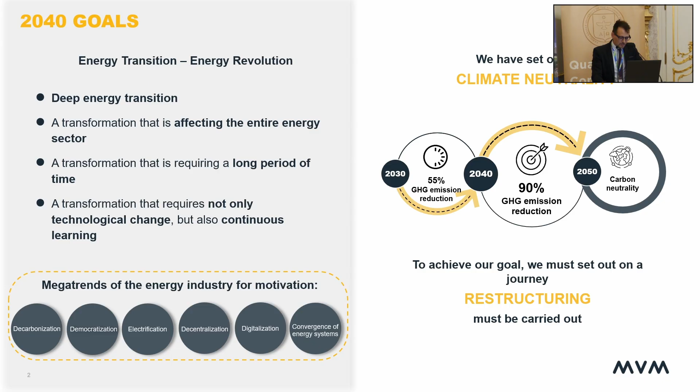It is not an exaggeration to say that we are experiencing a kind of energetic revolution in the energy industry of today. There is a revolution in the world of energetics, which basically means it is undergoing a major transformation. We can read a lot about energy transition or energy revolution in articles in the media - energy transition, green transition, etc. But in my opinion, it is an energy revolution.

So we have set our goal. We had very clear targets: climate neutrality. Let's see how we achieve our goals.

This energy revolution is a very deep energy transition - a transformation that is affecting the entire energy sector, that requires a long period of time. The transition cannot happen overnight. We need to go forward step by step in this energy transition, this energy revolution.

In my opinion, it's very important that this transformation requires not only technological change, but also continuous learning. We need to learn energy efficiency. We need to learn how we can live and work in this climate neutrality world and sustainable development - how we can use this climate neutral energy system.

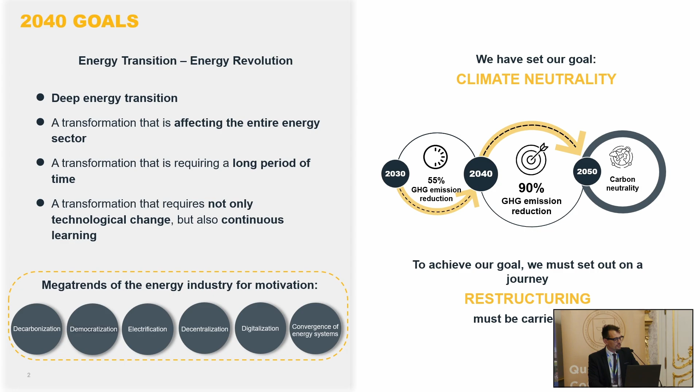These targets or goals designate the megatrends of the energy industry motivation. We had six important megatrends: decarbonization, democratization, electrification, decentralization, digitalization, and convergence in energy systems.

So for this environment and climate targets, the climate targets have an impact on the most important energy definitions and energy goals.

There is energy generation, transmission, and distribution, energy storage - very important - district heating and cooling systems, development of renewable technology, as mentioned by Fanny and Eva also, coal phase out - a very important keyword - and also energy efficiency and fossil-free transport. The transport sector also uses a lot of fossil fuel.

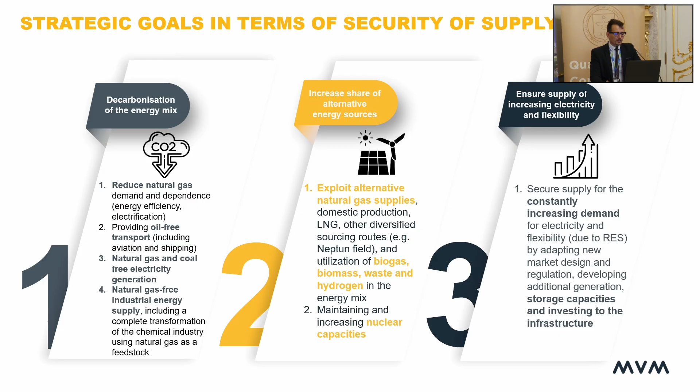The strategic goal of security of supply from the MVM point of view is decarbonization of the energy mix, increasing the share of alternative energy sources - for example, biogas, biomass, and hydrogen - and ensuring supply of increasing electricity and flexibility.

We can see in this slide that we use about 20% electricity from the total energy consumption, and in the next couple of decades, this electricity share is increasing to about 49% of total energy consumption.

As I mentioned earlier, one of the megatrends is electrification, because electrification is a good solution for how we can replace more natural gas and fossil fuels. Our direction is clear: coal phase out, natural gas free heating, and industrial energy supply.

We need substitution of natural gas in the energy mix, increasing the supply of electricity. Electrification generates significant renewable capacity and maintains nuclear production. The flexibility of natural gas-fired power plants is needed because we have a lot of weather-dependent renewable systems, for example photovoltaic systems, and this poses serious challenges for both the electricity generation and network sectors.

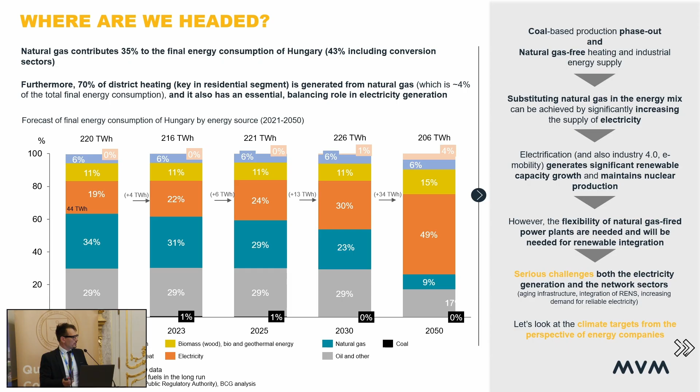As I mentioned, I work in the MVM Group, and MVM Group is a 100% state-owned company. We are the second largest company in Hungary, and we are very proud. We have a very big electricity portfolio - a total of about 4.4 gigawatt total capacity of electricity generation units.

We have one nuclear power plant in Paks with 4 units, about 2,000 megawatt installed capacity. We have more than 200 location PV power farms and power plants, with total installed capacity in our system of about 800 megawatt from PV. MVM Group's activities cover the entire energy value chain.

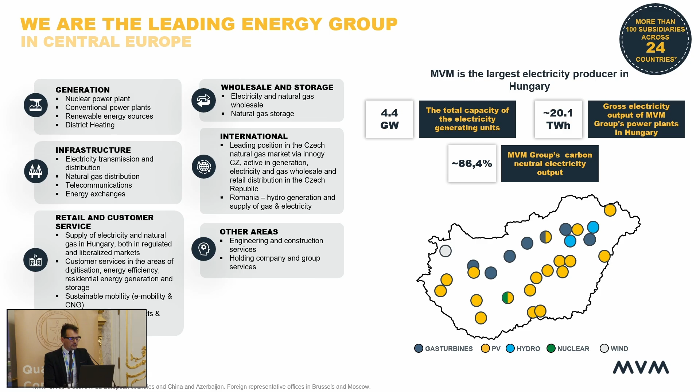The generation, the infrastructure, the retail and customer services, the wholesale and storage, international. We have the very massive international field, more than 20 countries, plants, power plants, and factories. We have also factories in China, I mean 2 factories. So this Hungarian group is growing step by step.

So what is our vision, or what is our targets? What is our strategy? In our strategy, the last strategy for MVM Group will be published in December 2023, and we looked ahead to 2035. We have 5 important strategic pillars. This is the renewable energy portfolio. We need plus 3,000 megawatt additional renewable energy portfolio, not only in Hungary.

The second important pillar is the nuclear capacity. So we started the lifetime operation in Paks. We have in Paks 4 units from Russia technology, but from a technical point of view it's a very good unit. So we started this lifetime operation project, and we're starting one SMR project. We are applying the SMR technology in the next couple of decades.

And if I mention, we have the very big renewable energy portfolios, and this portfolio is weather-dependent, and because of it we need plus 2,700 megawatt flexible capacity and tools to facilitate network integration.

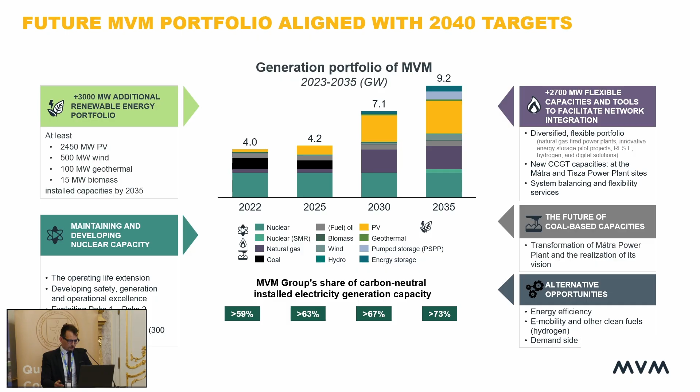And of course we search for opportunities and possibilities for alternative options, for example hydrogen. I would like to show 2 concrete projects from MVM's portfolio. One of our options is hydrogen, or one of our options is to exploit the potential of hydrogen. Why hydrogen? It's a very important question, and I know it's not an answer to all of our questions, but in my opinion, in the future hydrogen will be a very important energy source. So why hydrogen?

Because hydrogen is a highly versatile energy source. It offers multiple pathways for utilization and can be produced through a variety of technologies. Hydrogen doesn't have carbon molecules, so if we combust hydrogen we have 0 CO2 emissions. So our target, shown on the right side of this slide, is to put hydrogen into our natural gas system, and by burning this energy mix of natural gas and hydrogen, we can reduce the CO2 emission. And we know it needs to go forward step by step.

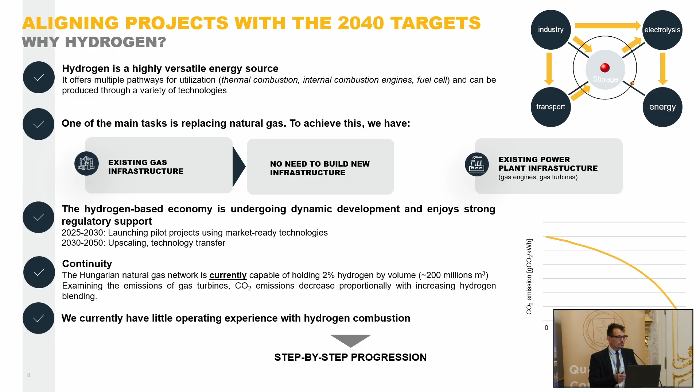For example, the first part, we would like to mix 2% by volume into the natural gas system, and step by step increase to 10, 20, and so on. So one of the main tasks is replacing natural gas and achieving this. We have existing gas infrastructure in Hungary, so if we use hydrogen we don't need to build completely new infrastructure. We can use the old natural gas system from an infrastructure point of view.

So the second energy project for the MVM group, a very important area, is energy storage. We have built a huge weather-dependent renewable portfolio, and the security of supply cannot be based on this alone. We need to address energy storage, and battery energy systems are one of the keys to supporting renewable energy production, energy efficiency, and security of supply.

We are very proud that we finished 2 pilot projects in the last couple of months: Horus and Tesseract. Both are at the Liter site. Liter is a very small town in Hungary, but it's a very important energy center of the Hungarian system. The Horus project is a lithium-ion battery energy storage, and the Tesseract is different, it's a sodium-sulfur battery.

It can be seen that we are building a diversified portfolio from BESS systems also. And we have prepared 3-4 new projects, which are in preparation: Bakony, Tiszan, and Sopron, in different places in Hungary. Both are lithium-ion projects, and we can show the total installed capacity is growing year by year.

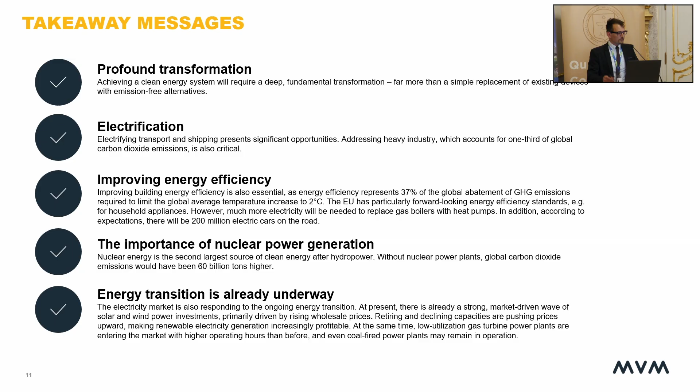And what is my takeaway message? In my opinion, we have a lot of keywords, a lot of strategic pillars. So profound transformation, electrification, if I mention, is very important. Improving energy efficiency, the importance of nuclear power generation, is very important in Hungary. Then the energy transition is already underway.

And it's absolutely my personal vision: if we work hard, we will get there in 2040. The specter of climate change is finally exorcised. The global temperature has started to stabilize or lighten, and our electric cars and vehicles are totally green. Our homes are connected to a green energy grid. Boats, trucks, and buses are no longer belching out CO2.

So see you in 2040 in Budapest in the natural world. Thank you for your kind attention.